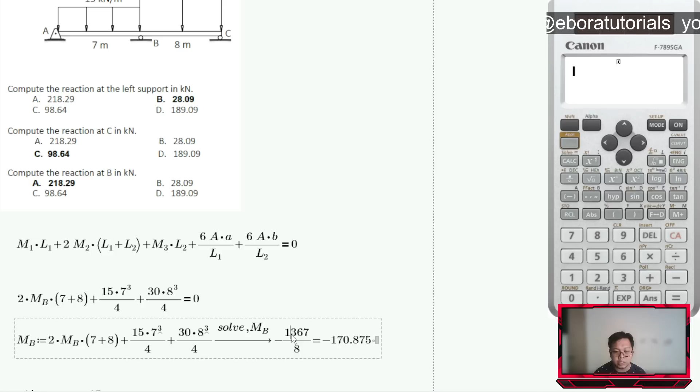M3 is 0, and then ito, 6Aa-bar over L is actually equal to WL cube over 4: so 15 times 7 cube over 4, and then 30W, 30 times 8 cube over 4. And then notice, you only have one unknown here. So feel free to solve MB using your calculator. I know you have your shift solve function, no? Pag shift solve na lang, and then makuha natin ang MB equal to negative 170.875, meaning we have a negative bending dito.

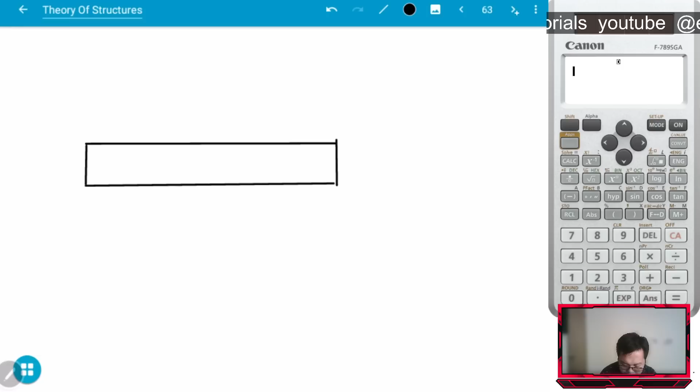Yan. Okay? And then, from the cut, maglalabasan, di ba, basta hatiin mo yung beam anywhere, maglalabasan yung moment, which is M, at saka yung shear. However, nasolve ko na yung moment. Di ba, ang moment natin dyan, anong halaga yung moment?

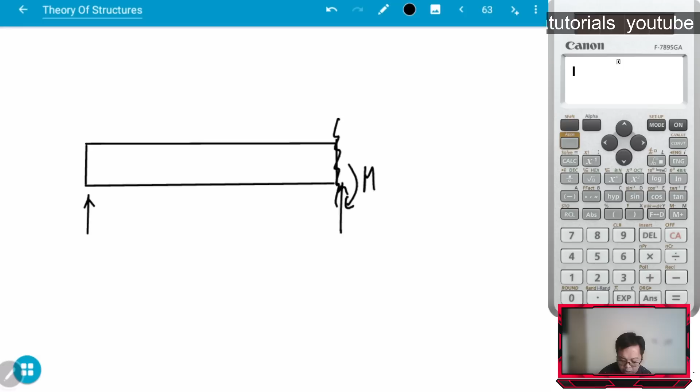170.875. Okay? Now, negative bending, kaya pag negative bending, it will tend to bend the beam pag ganyan. So, kaya negative yan. Now, I do not need to write the negative sign talaga dito na negative 170 kasi yung rotation ng moment ko is already negative naman.

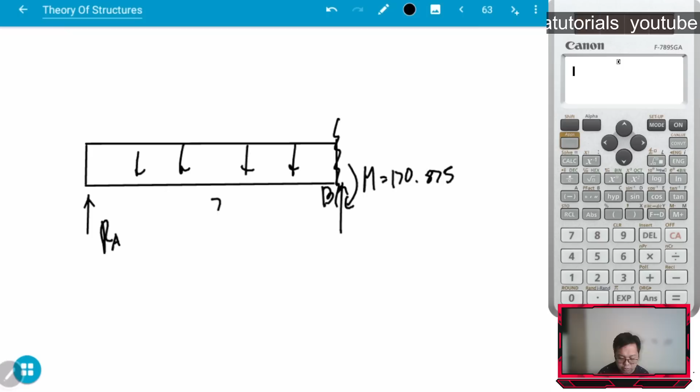Okay? So, with that, actually, pwede mo nang masolve yung RA by summing up moments dito sa cut or dito sa B. Kung magsum ka ng moment sa B, you can actually solve RA. So, check na natin. So, sandali, ilipat ko muna to. Ilipat muna natin. Yan. So, summing up moments at B is equal to 0.

Clockwise, that's RA times 7. And then another clockwise is the 170. I assumed it to be clockwise. And then that must be equal to the counterclockwise. Ang counterclockwise will be the resultant of this load, which is 15 times 7, and then its moment arm na 7 over 2. Kaya that's 15 times 7 times 7 over 2, or that's 15 times 7 squared over 2.

Okay, again, you have one unknown here, which is RA. You can easily solve RA by using your calculator, shift solve, or simply by using basic algebra. You will get RA equal to 28.08, which is nandito ba? Tama. 28.09. Tama ba? Tama. 28.09. Sige. Highlight muna natin to.

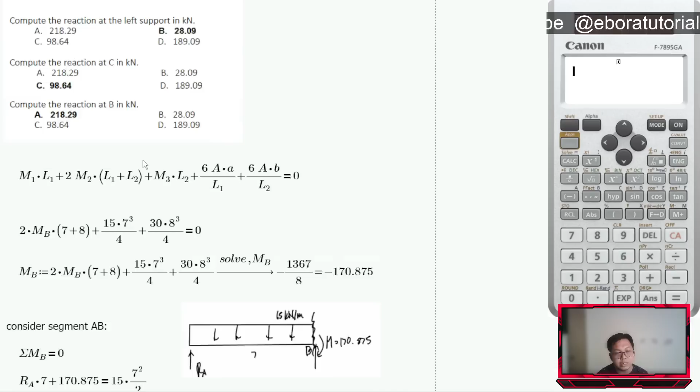Yan. Next is we need to get RC. So to get RC, you can still do the same thing. Hatiin mo dito sa gitna, and then you can consider the right section. Or instead of hatiin, actually you can directly sum up moment. Tingnan nyo, ang ginawa ko dito. This time, I considered the whole beam na.

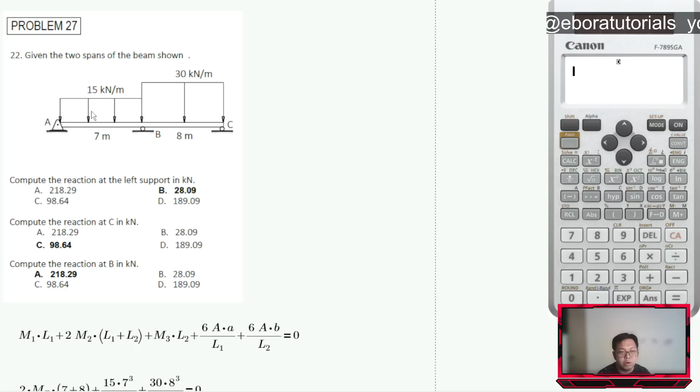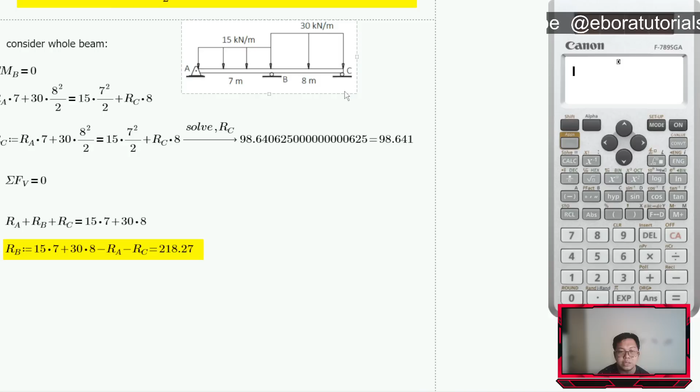And then by considering the whole beam, ito yung whole beam natin, what will rotate dito, okay, so ito yung whole beam, no? So, what will rotate sa B is actually the reactions A, C, at saka yung load. Sir, how about yung moment sa B? Hindi yan magro-rotate. Notice, wala yung MB natin na 170, wala dito sa problem.

Kasi yung 170 na yun, that was actually the internal moment. Lalabas lang yun kung hahatiin natin. Kung hindi natin hahatiin, then hindi yan lalabas dyan, sa whole beam natin. Sige, so summing up moments here, by the way, I assume the reactions to be upward.

So, ang clockwise will be the reaction sa A with a moment arm of 7. Another clockwise will be the 30 kilonewton load. So, that's 30 times 8 times 8 over 2. And that must be equal to the counterclockwise. Ang counterclockwise will be ang 15, di ba? Counterclockwise with respect to point B, that's 15 times 7 times 7 over 2. And then plus the reaction sa C, which is RC times 8 meters from point B.

And then again, notice the whole equation, isa lang yung unknown kasi ang RA na solve na natin. Feel free to use your calculator, shift solve, and then you will get RC equal to 98.64. Tama ba? 98.64 ba? Tama, 98.64.

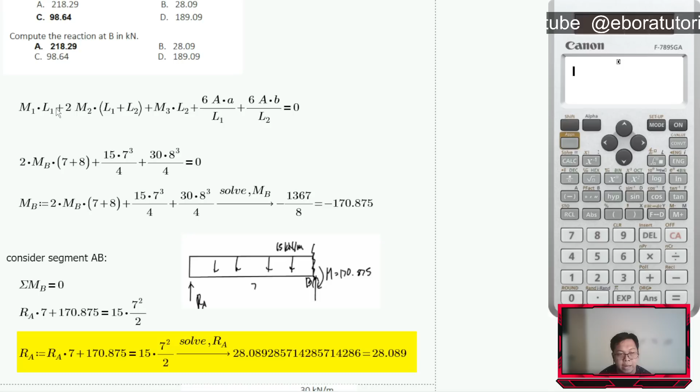And then, once nakuha mo na RC, to solve for RB, you can just sum up forces. Vertical upward equals downward. Upward will be all the three reactions, vertical, and then the downward will be the resultant of these two rectangular loadings. Then you will get RB, since solved na natin ang RA and RC.

Sige, so I hope okay tayo dyan, ha? So ito yung pinakamadali, ha? Ito yung pinakamadaling paraan to solve for this problem, especially if continuous ang beam. Sige, same pa rin.